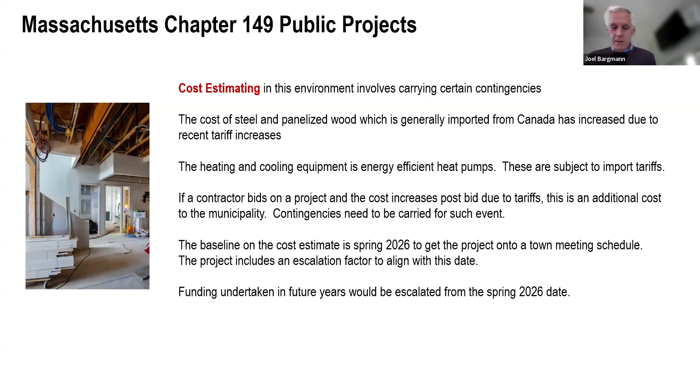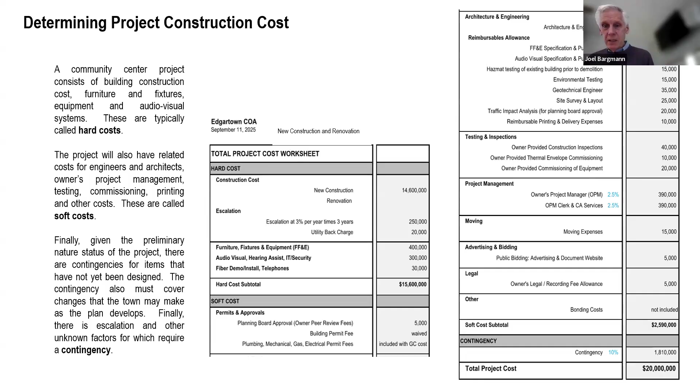That's a long-winded way of saying we've given you a cost estimate. It's a little bit different than before. It's a fluid process. What we've also done is work backwards on the cost.

We discussed with the town manager, and at previous meetings, that $20 million as a project cost seems to be a good working number today. It could go up, it could go down, but it's nice to have a threshold and a point to start at.

When you work backwards from that number and take out furniture, audio-visual equipment—each room has full audio-visual capability in the new building—and take out design and owner's project management costs, and all the costs related to the project, it gets you to the construction cost. So in other words, you have about $14 to $14.6 million to build the building with, and other costs are the audio-visual and furniture. But what we don't want to do is go to town meeting without the full project in that appropriation, so the full project plus contingency gets you to the 20 million.

So what we've done is try to work the program out with you all, with the COA, and with our team to come up with the size of a building that works within that budget, and see if this all works as the feasibility study. With that, let me pass it on to Nancy to talk about what that program is and then walk through the site analysis. Thank you.

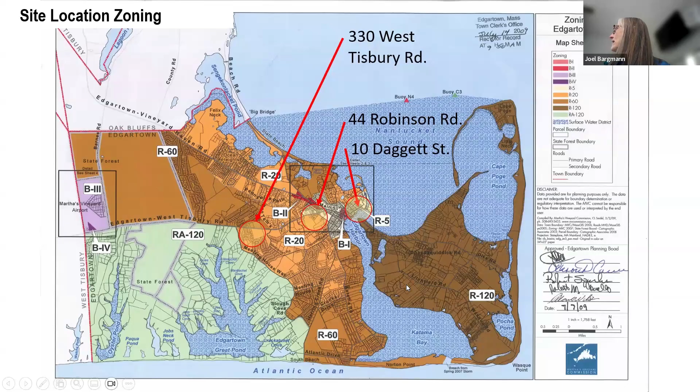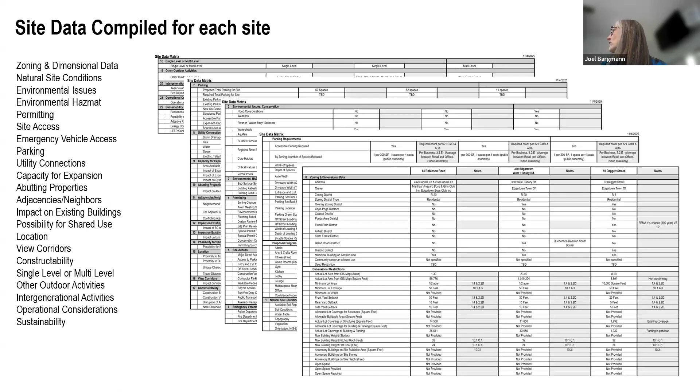We looked at the zoning: 2 of the sites are in R20 and 1 in R5. We compiled data for all 3 sites—Robinson Road, Edgartown West Tisbury Road, and 10 Daggett Street. I'm not going to go through all of it, but it includes a lot of information required by zoning, dimensional data, parking, emergency vehicle access, adjacency, and so on. This chart will be included in your report.

Since the last meeting, we've done a deep dive into the anchors to really try to examine what are the difficulties, what are the challenges, and what are the opportunities, if there are any.

Here's a map. As you can see, here's the anchors, very close to the water. This is Daggett Street. So trying to break this down into the site issues and the building issues.

For the building issues, the current residential structure doesn't meet the standards for commercial building. The floor loading is not adequate for commercial, so ideally you would beef that up if you were going to stay there and do an addition. And any construction, additions, or renovations would create havoc in the area with all the queuing for the Chappaquiddick Ferry. That would be a major difficulty.

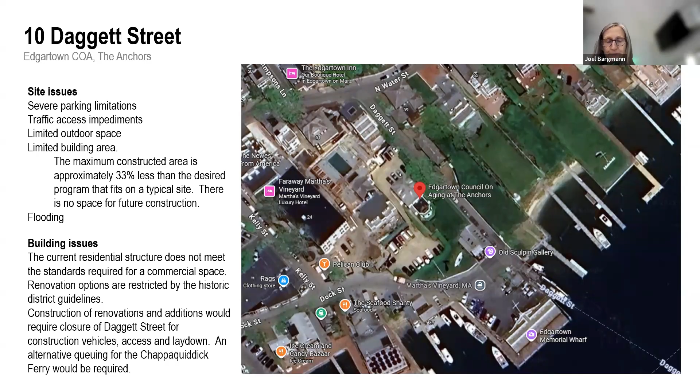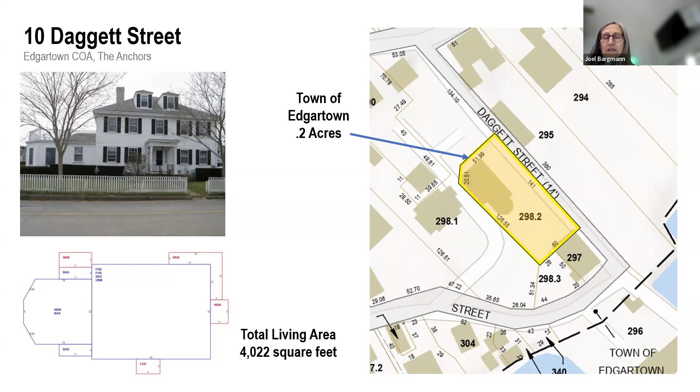Here's the property record card. You can see that we only have 0.2 acres. The building is sort of right on the property line on the southeast side, and it labels the total living area as 4,022, which I think includes the basement and the attic.

One significant issue that is a difficulty with the site is the flooding. This site falls within the FEMA VE zone, which is the 100-year flood zone, meaning you have a 1% chance every year for it to flood. The VE zone puts anything built there vulnerable to damage from high velocity wave action and winds during a storm event, so the structure could be seriously damaged.

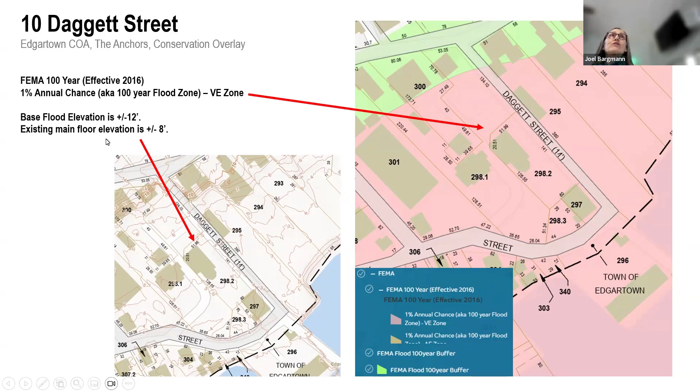Any future construction is limited to being built above the design flood elevation, which has to be above the base flood elevation. The base flood elevation here is 12 feet. If you look at the contour map, the elevation here is 5, and your existing main floor is probably about 2.5 feet above that, so you're approximately 8 feet—substantially below the base flood elevation. So any additional construction would have to be even higher than that.

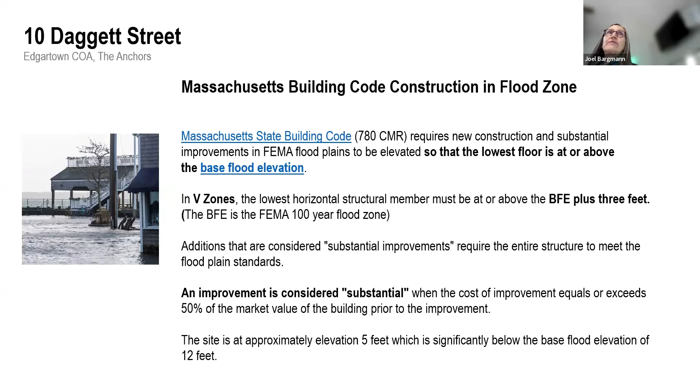This is a significant shortcoming. Another shortcoming that all of you know is the traffic queuing for the ferry. This is a beautiful street.

It's a beautiful front yard, beautiful facade, and you'd like to be able to drive down the street and enter the building—it feels very important and lovely. But unfortunately, you've got traffic that queues up for the ferry, so people can no longer come in this way. You also have the old Sculpin Gallery down at the end, which is a really nice adjacent neighbor and adds to the appeal of the site.

Parking and access are two major issues that all of you are very well aware of. You only have 9 parking spaces in the front portion, and in the back portion you have 2. These don't belong to the town—they're used conditionally while the Anchors is open, but they belong to the Faraway Hotel.

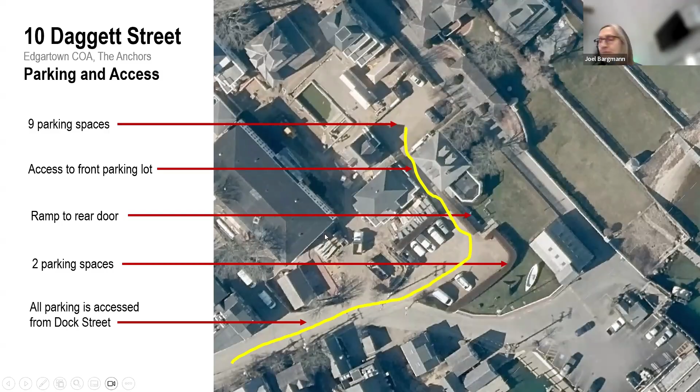Any traffic entering the site has to come through here. You've got to drive through this narrow driveway and then try to get your car turned around and fit into one of these spaces. Pedestrians also have to come here if they want to get to this door—there's a ramp they can take through the back, and there's an entry door here. So this is certainly not ideal.

This is an example of how the parking lot can get pretty full, but you still don't have enough. Even at 11 cars, for staff and patrons it's nowhere near enough, and there doesn't seem to be any alternative for parking or access, given the conditions with the ferry.

These parking lot configurations and where the building is. So the main parking lot used to be accessed through here, but now there's trees, so you can't come in this way. There's signs that designate the parking spots here, but because there's no place to stripe it, because it's gravel, people don't always park in an efficient fashion, limiting the number of cars that can actually fit there.

And then these are the two spots in the back. Again, the maneuvering difficulties trying to get in here is intimidating to the patrons, so I think it keeps people away. As Lindsay said, there have been some fender benders in the area, so that's definitely a problem.

Access into the building: from the back, you've got this long ramp that leads to this door at the main function room. You also have this ramp that you access through the same path that the cars do, to get around to the front. Then you have this bulkhead here that separates the two, so you can't really have a continuous thing. This is the door where most people enter from the parking lot.

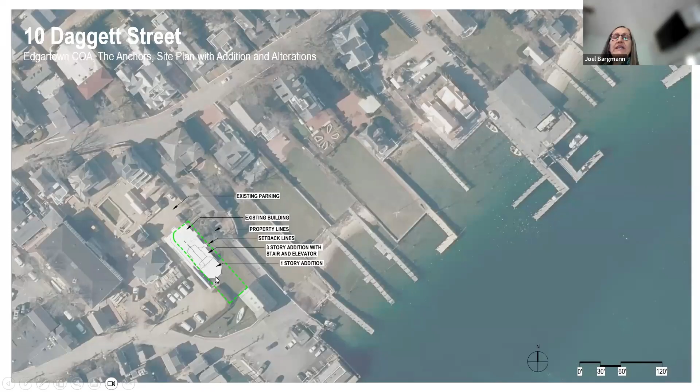So what could you do to improve it? This is a site plan of a potential minimal study for some things we looked at.

All right, it's not accessible. Can you add an elevator and a second means of egress? So this study shows, if you do add the elevator and second means of egress, you're taking up most of your current multi-purpose room. So at a minimum, if you did that—I'm not saying you're going to—you would want to replace that room.

So by adding on this space, your total first floor would be 2,627. And then on the second floor, in order to get from the elevator to all of the rooms—and this would be a benefit for sure, because all of these offices would be handicapped accessible, and you'd have a second means of egress—but this one office would get reduced to allow for a corridor.

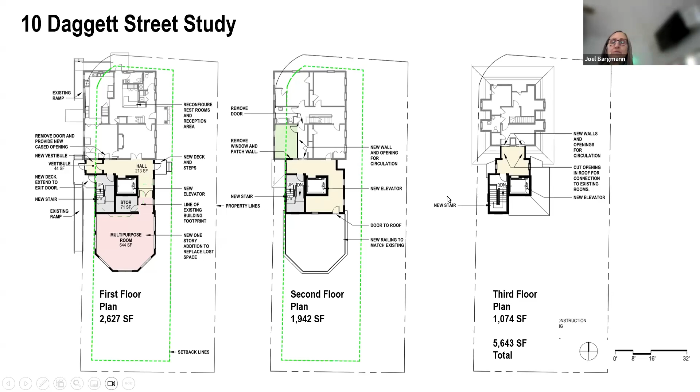Third floor, just access to the space. This could be reconfigured if it turned out you wanted to do that. There is a chimney right here, so you'd have two small openings. The other things to consider are the elevator and the stair going up to the third floor, whether or not it would be worth it, because it's going to be higher than the existing building by the time you get to the roof over the elevator.

So just looking at that as a hypothetical, in addition to the plans that I just showed you, this estimate includes things like new windows, a new roof—which we didn't realize you already have one—and bringing the building up to current standards with the HVAC and the insulation and the floor loading, increasing the structural support of the floors, which would also require new ceilings.

So this total project cost—well, we're looking at construction costs of $6,460,000. When you add in all of those things that Joel mentioned, soft costs and so on, the total project cost is $9,556,000. So just a study, so you have the information.

Second site is the one most of you have seen before, but I'm just going to run through it. So you can see for comparison, you have 23.4 acres. This is the wastewater treatment department, and it's at 330 on West Tisbury Road.

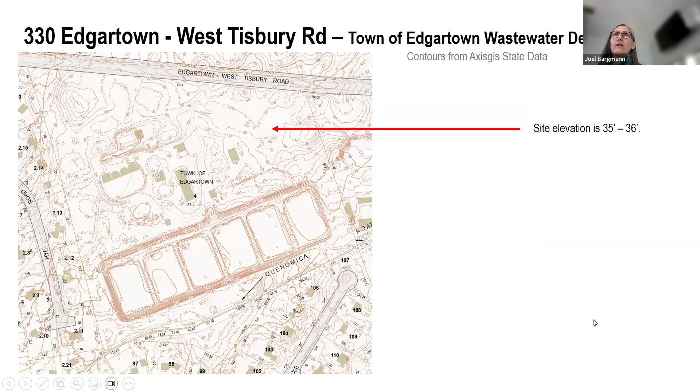This large site—we looked at the potential of locating a building here, and also locating a building here. So this is the one that seemed to work, that we thought was better for a number of reasons. This is the one we're showing in the study.

You can come in from the same drive into a drive, which would include a drop-off and then a parking lot and a pedestrian connection to the pedestrian path. And then you have this nice southern exposure for a lot of outdoor activities and a green space. This is the Morning Glory Farm here. The green is the building setback line, the black line is the property line.

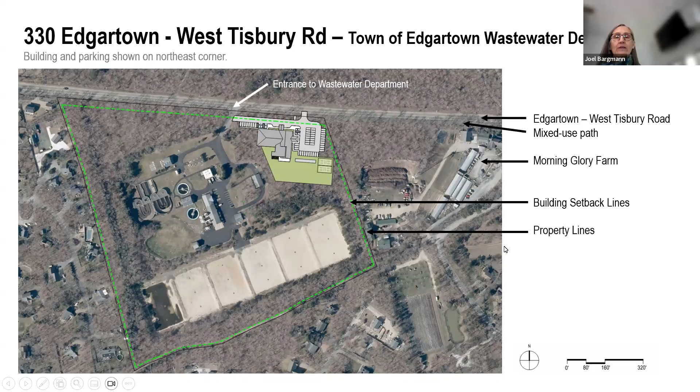Zooming in closer to the site plan, as you can see, we're keeping the building fairly close to the road to give a nice presence of the front part of the building to people driving by, and also for the pedestrians, which creates a more inviting impression than if you put a large parking lot in the front. But you do have the drop-off on the right side for the car, which works best for dropping people off, and then you can come and park here and you're still pretty close to the entrance.

This is a covered drop-off area. The site also shows the possibility of adding bocce courts and pickleball courts and a pretty nice green space, patio, and a greenhouse.

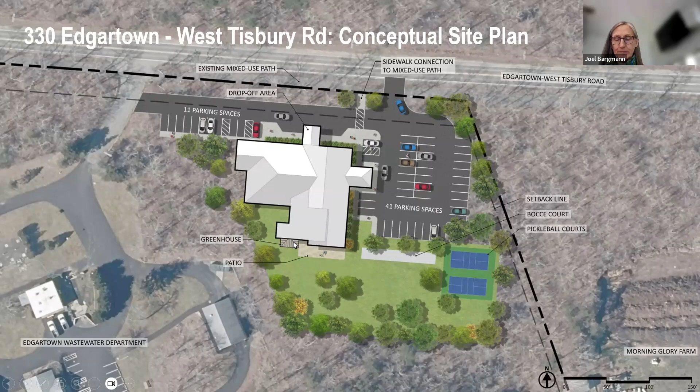The floor plan is a nice, simple organization of an L shape. The L shape creates this sort of nice semi-sheltered area for a backyard. And it's organized in that the corner of the L is the administrative wing, so they can keep an eye on people coming and on the parking and also be accessible to all of the other facilities in the building.

From the entrance, it's a very clear shot to the main public areas, the lounge. The lounge is a nice place for people to wait outside of the multi-purpose room while they're waiting for programs. They also have a nice view of the backyard. There's a coffee bar, covered patio, and a greenhouse and access to this patio, so we see this as a really nice social area.

And then the other wing is the main program rooms, the activity and game room, showing some card tables and a pool table, arts and crafts. And then the flex room is big enough for 20 people to have an exercise class. And then you have a little room outside for people to mingle and put away their belongings.

Also close to the entrance is a shared conference room, pretty good sized, for staff meetings and for small programs. You've got a health office, which would be shared for health and professional use. Your support facilities are centrally located, your restrooms and storage, and then a common companion restroom with a shower.

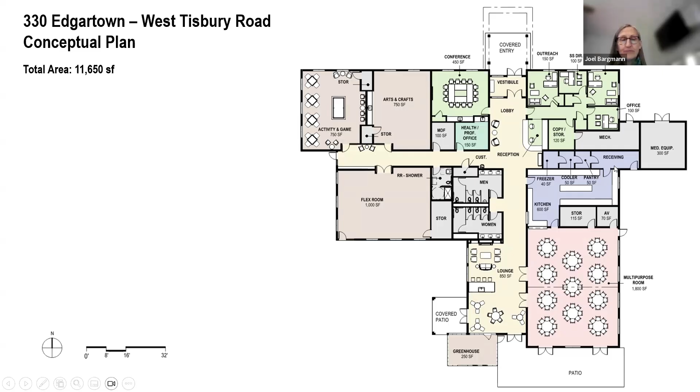Some of the images of these program rooms, the multi-purpose room - the full room can seat with a lecture 64 seats, and I'm sorry, that's a half and half, 64 seats and 40 seats as dining if you have a partition. And then if you have a large style, like a big lecture like this, you could get 140 seats.

And then looking at the plan there, you have the dining setup that shows there, and the dining is, you can get 88 seats. So looking at these images, this is a potential multi-purpose room layout with tables and chairs for dining. And here's a lecture. This building would be a single-story building, so you would have the potential to have some nice high ceilings, some nice lighting coming through, so you could give a really nice, comfortable feel to the space, kind of like the room that we're in here.

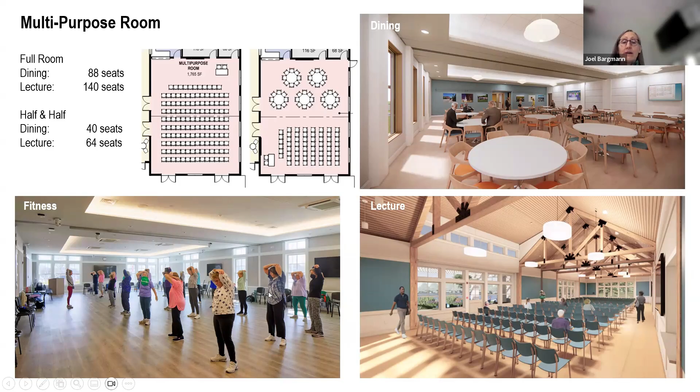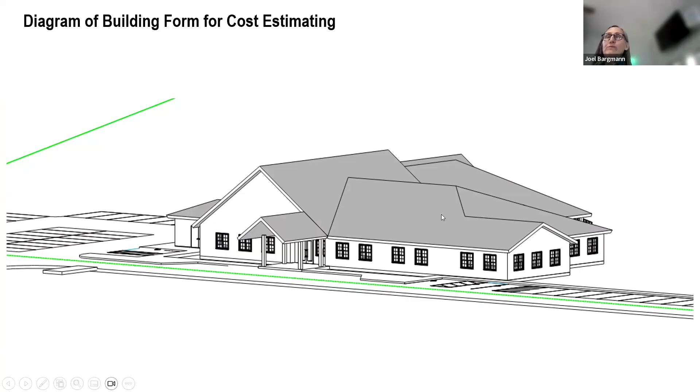Again, Joel explained sort of the ups and downs of that.

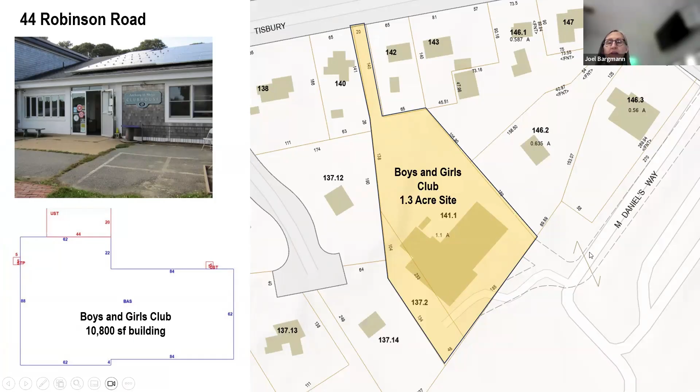The third site, Robinson Road, current site of the Girls and Boys Club. This is a property record card. It shows 1.3 acres, and this is the current footprint of the Boys and Girls Club, and you have this pretty nice enclosed backyard. The elevation here is between 17 and 22 feet, and the building sits at 19 to 20.

Some of the existing conditions: you have a gym that is existing. We did look at the building, took a tour, and it seemed like the gym was worth saving, but the other part of the building didn't seem like it was going to work for the Council on Aging. So our recommendation would be to take that down and have a combination renovation of the gym and new construction.

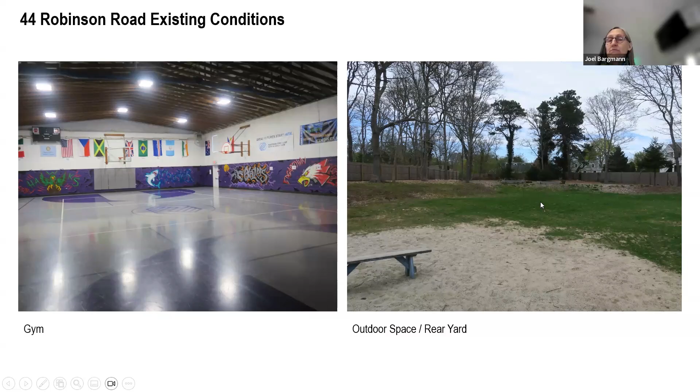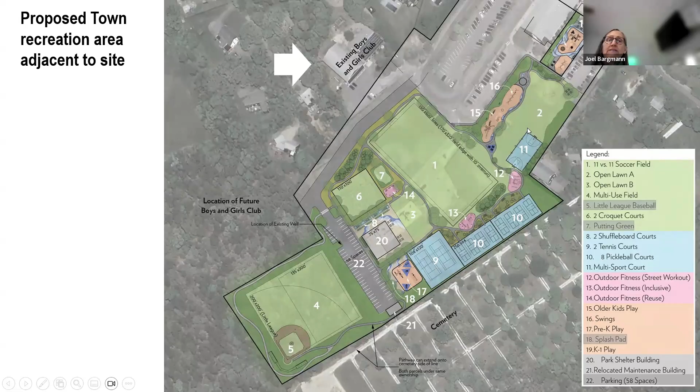One of the big advantages of this site is the park across the street, and also the proximity to the library and schools right over here. This park is in the planning stages of a renovation, which is going to provide multi-sport and pickleball courts and playing fields. It's a huge amenity to have across the street from the Council on Aging.

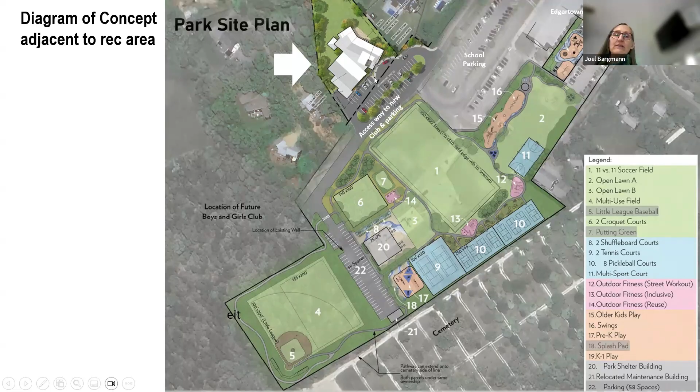Going back to the parking, this is double-loaded back-to-back with an island, so that we could soften the impact with some planting as well.

In an earlier scheme, we looked at providing a cover for this corner, but we took it out because of budget reasons. But you could always add it in the future if you wanted to with this configuration.

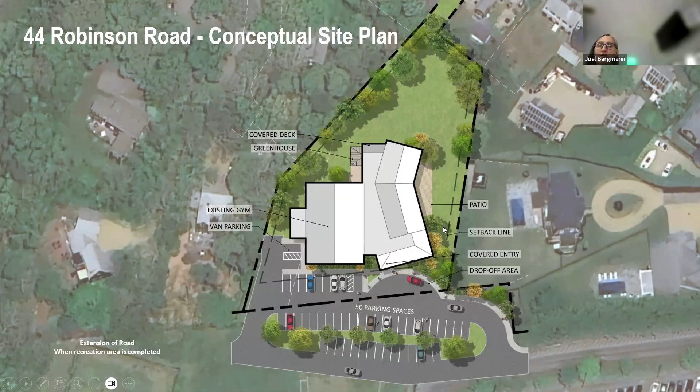The greenhouse would be accessible from the lounge, and then you could also come out to this patio as well.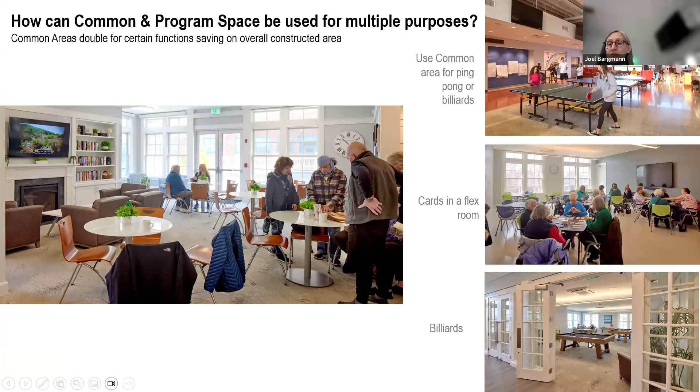So the difficulty with billiards is it wasn't ranked highly in the survey, and billiards kind of needs a dedicated space, so you really have to think hard about whether or not you want to put that in. It's a very good way to attract men, as you all know, though a lot of women like to play billiards as well. So it's just some of the things to think about, the pros and cons of the options.

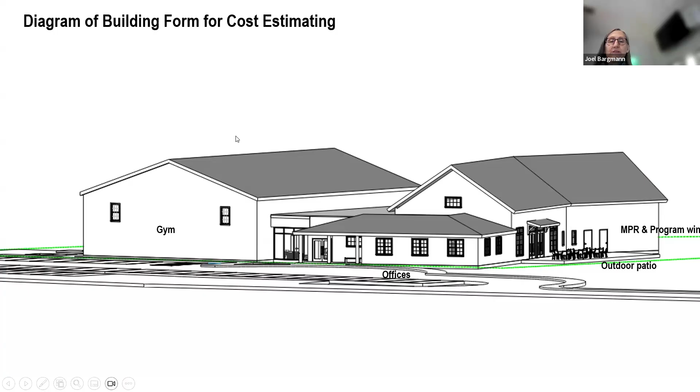This is a massing diagram for the Robinson Road. So we're looking at a sort of a high space for the multi-purpose room and the program room, the flex room, and then this lower entrance area for the offices, and then there's the gym, so we want to articulate the separation between the two.

So you're not always comparing exactly the same thing back and forth. Every site has its advantages and disadvantages. So I'm going to let Joel talk about the cost estimates.

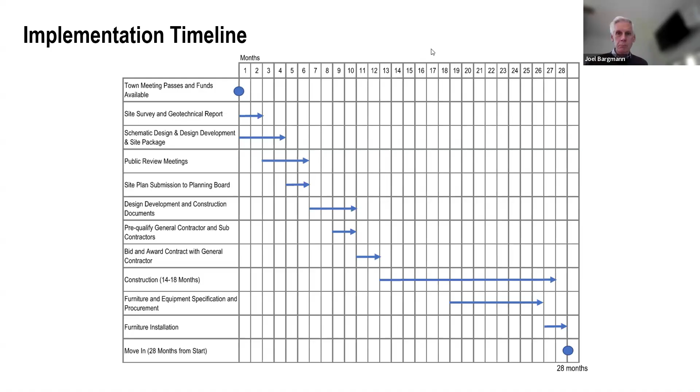Whether or not we can do that with paid Edgartown employees is another issue, but I think there are many different ways we can look at to try to use the space to its capacity. And I think we're all very committed to the idea of this being a community space. I think that would only enhance the town and what it can offer - to have more spaces available to community members, whether it be sporting, meetings, gatherings, knitting groups, or whatever it might be.

I think just having more options and opportunities for the community to use the space would be a welcome addition to the town. I was just going to comment that historically, this age group, and I actually put myself into this, don't like to drive at nighttime, so nighttime programming has never been something that's on our radar anyways.

Not to leave anyone out, but until you have cataract surgery, you tend to see some tracers when you're driving at night, and people don't like to do it.

But I would argue that there are people from 55 to 75 that would probably come if there were night and weekend hours. And the reason we have such an older population here is because we don't make anything available for those people.

Again, I feel like we're really driven day to day in the COA operations by what people want and what they tell us they're looking for. So anything is possible and we're happy to try to find a way to make it work. If people say we really want nighttime, whatever that might be, it just may not be through paid Edgartown staff. It might be someone from our friends organization runs it, or there's a community member who runs that gym program at night. I think anything is possible, and we are always driven by participants' interest.